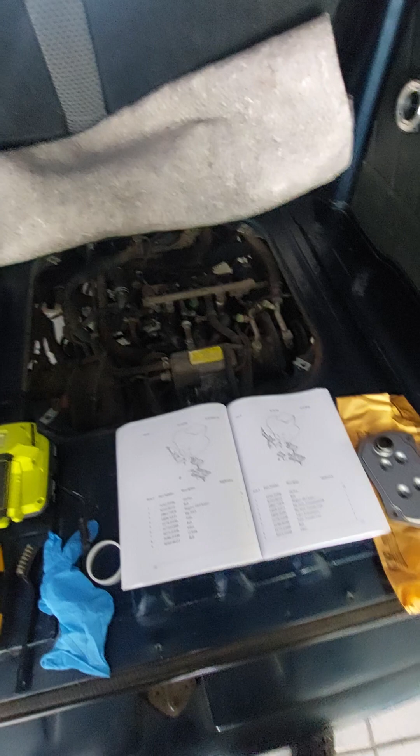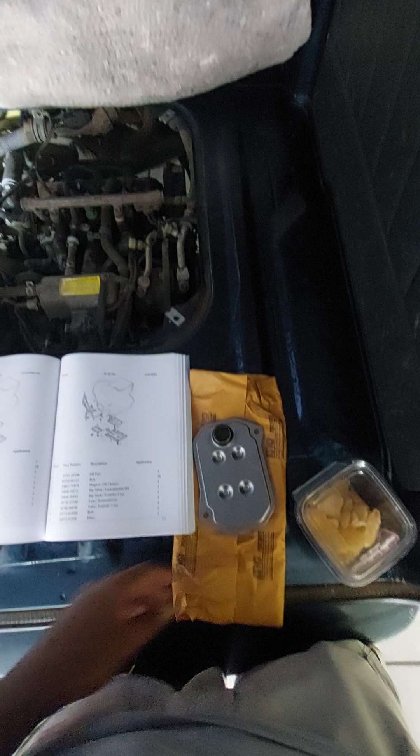Today I'll be working on the Suzuki JoyPop, a non-turbo F6 engine, DF51 chassis number, and today I'll be working on the automatic transmission filter and oil. I don't have the oil with me, but I do have the filter that I just bought from Amayama in Japan. It arrived pretty quick through UPS.

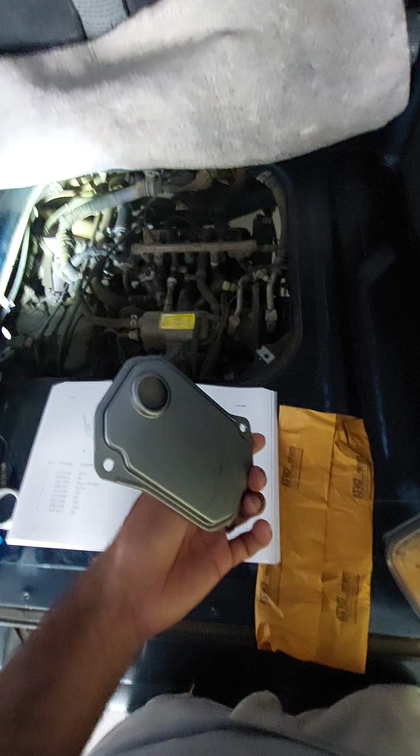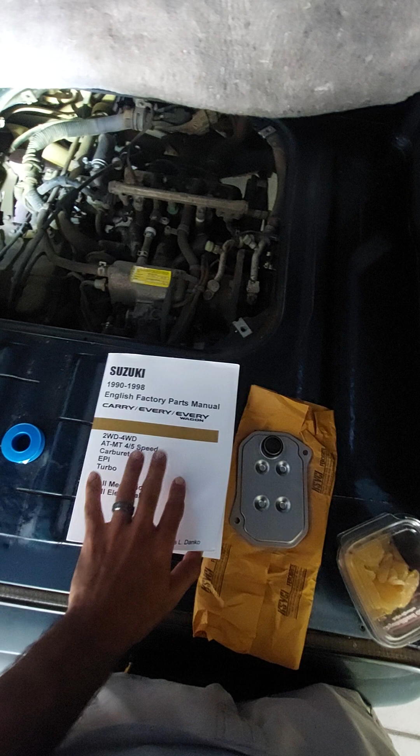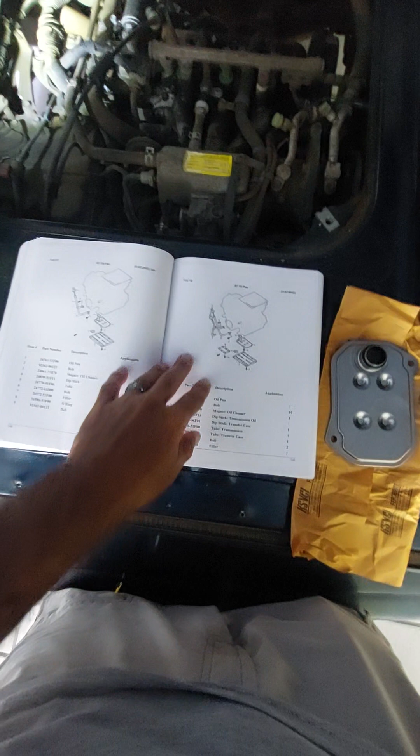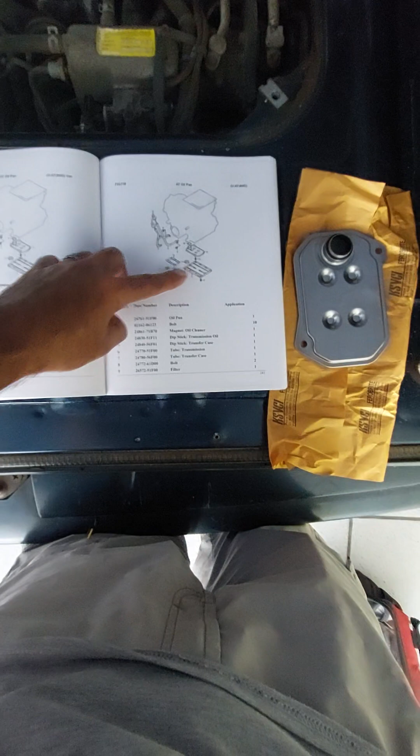So how did I find this automatic transmission oil filter? Well, I just bought the book first, because for the mini trucks it's much easier to find the parts, but it's not the same for the minivan. So I purchased the book through Amazon, which covers both Carry and Every van and mini truck. And here you can take a look at the four-wheel drive automatic van, which is the same that my wife has. And here you can see the filter.

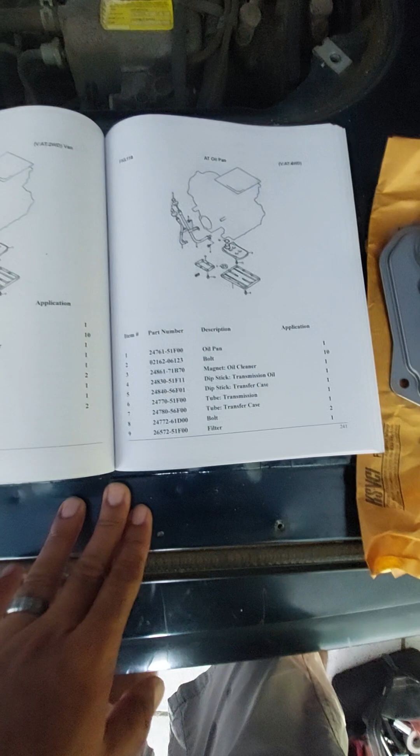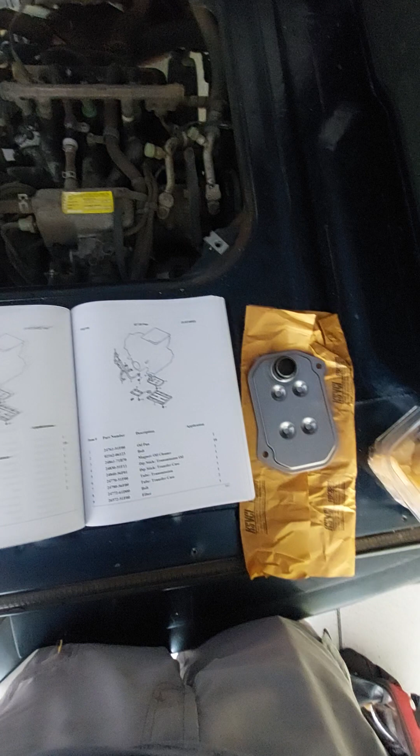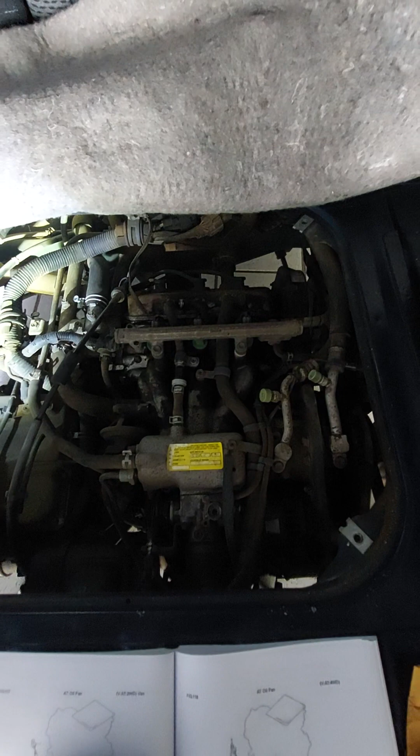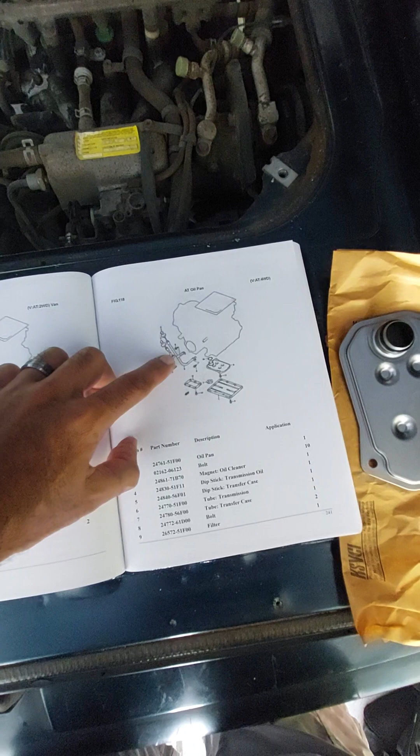Part number I can share with you is 2657251F00. That's for the automatic transmission filter. Obviously, if you have a manual transmission, you won't have this filter in your system. And my minivan is not carbureted, it's fuel injected, 1996. Okay, so here's the filter.

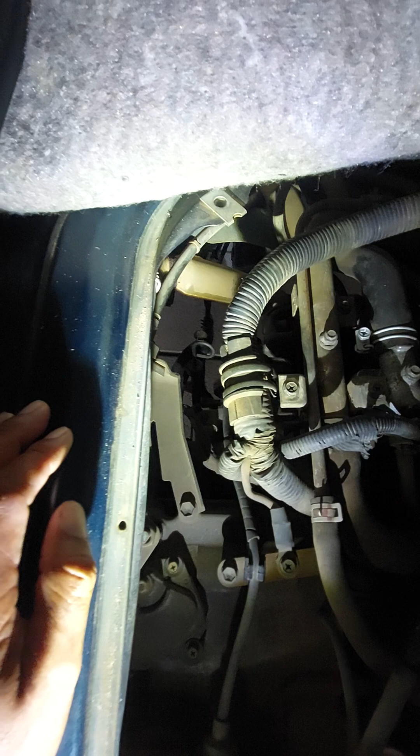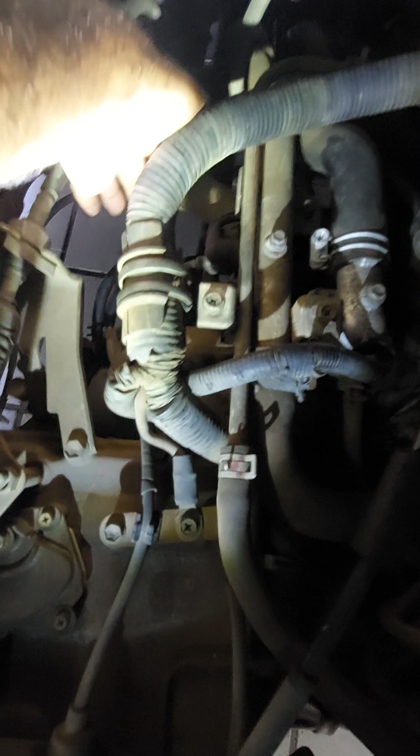Here you can see two dipsticks that you'll see next to the engine when you open up your trunk. One with the loop is for the ATF transmission fluid. The one in the back, this one here, this is ATF transmission fluid oil, and this one over here is for the gear oil, which is a lot thicker. So have that in mind when you're checking your fluids in your minivan. For the engine oil, that one will be over here. This is the dipstick.

Now let me show you pretty quick. I use a 24mm socket for the plug to drain the transmission before I start with anything else. And for the screws of the oil pan, it's a 10mm. Also, to remove the filter, it's 2 screws: 10 screws for the oil pan, another 2 screws for the oil filter. And I just pry the pan a little bit here. I put a recipient underneath to catch the oil, so that I wouldn't make a mess, but I still made a mess anyway. And that's pretty much it.

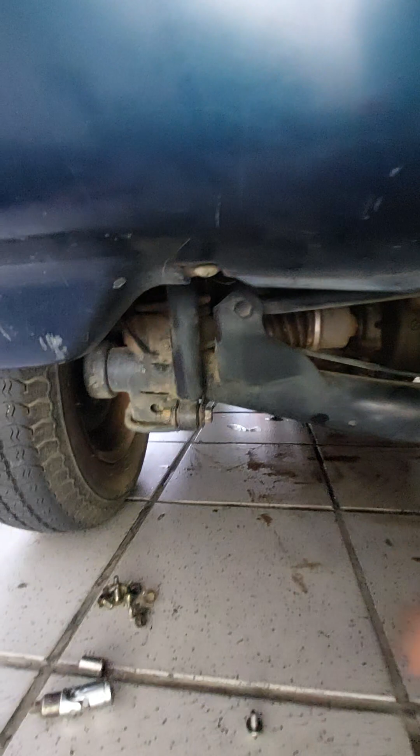You can probably see the screws here, and when you remove the filter, it's gonna look like this. When you remove the filter, be careful that it doesn't fall in your recipient and your catch, and have in mind that it will be holding on a seal or O-ring in this neck over here. So have that in mind when you remove it. And then you just pull it and keep it away from the water.

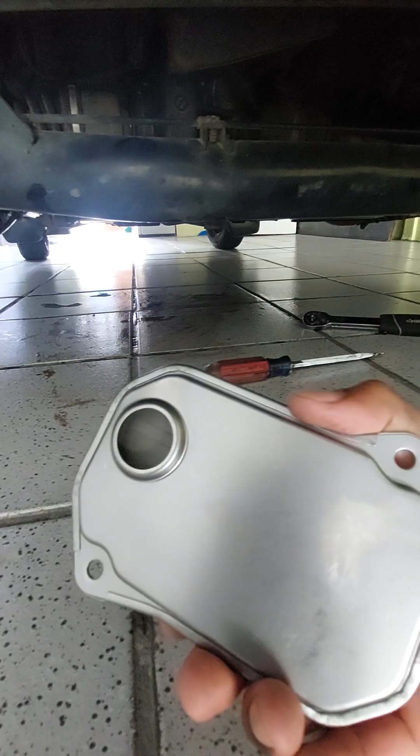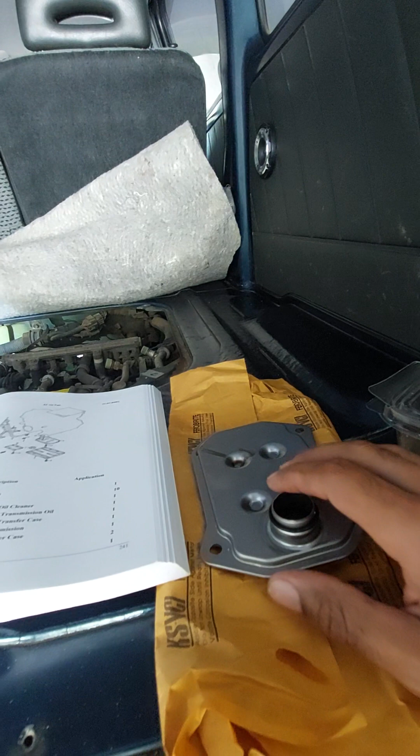As you can see, it has no paint. So if you order this and you're not gonna do the job right away, keep it away from humidity, don't store it outdoors, or just to make sure, order it when you're about to do the job. The other one that I removed wasn't looking that bad, but as soon as I washed it off with a degreaser, my mistake, almost immediately it turned brown, like from corrosion. So keep it away from water. While it's in the transmission, you don't have to worry because it's covered in oil.

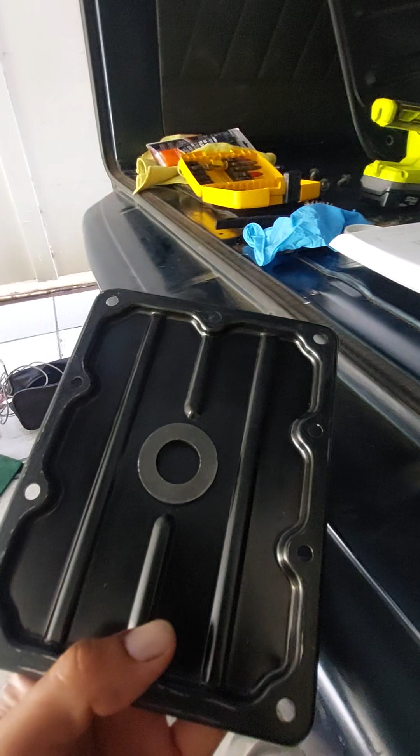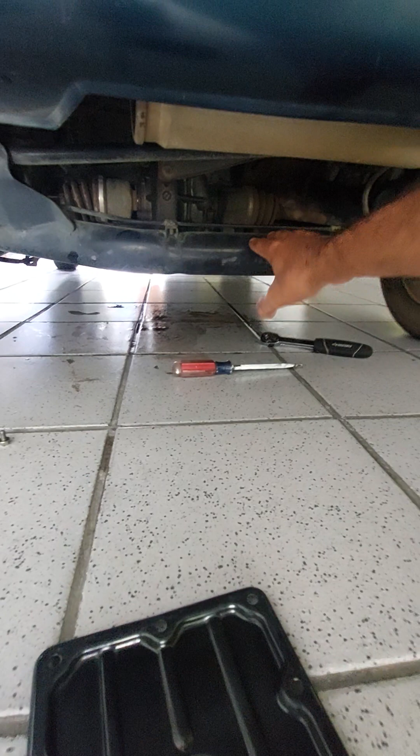This is the oil pan, and as you can see, I haven't even jacked the car. No need to. Pretty easy. The hardest part was to clean the gasket that someone previously made. That took some time. The mesh of the filter, you can see there's a mesh there. The previous one wasn't looking that bad.

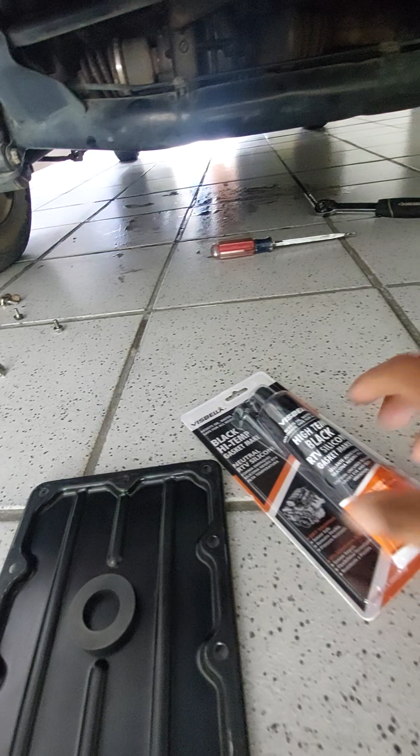The magnet that's supposed to collect all the metal particles was covered in a lot of it. It looked like a lot of mud covering the magnet, so it wasn't doing its job due to that. So I had to clean it up pretty good. It's kind of hard to pull it. I'm gonna put it back in the center, and the next step is to put the gasket maker. So that's the next step that I'm gonna do.

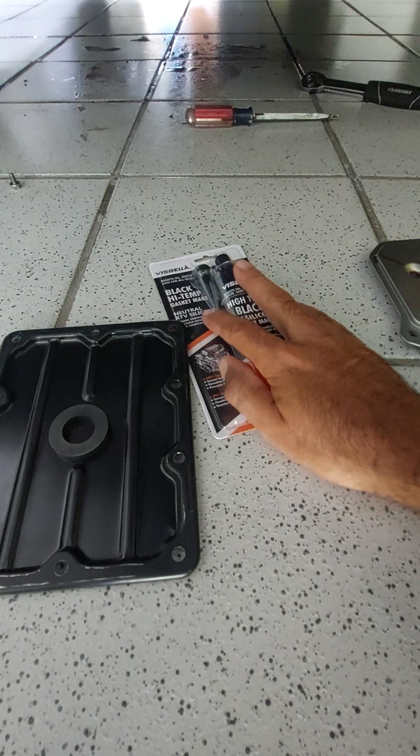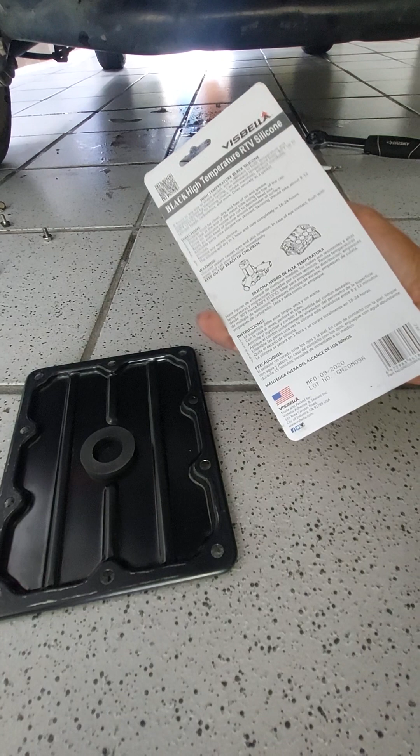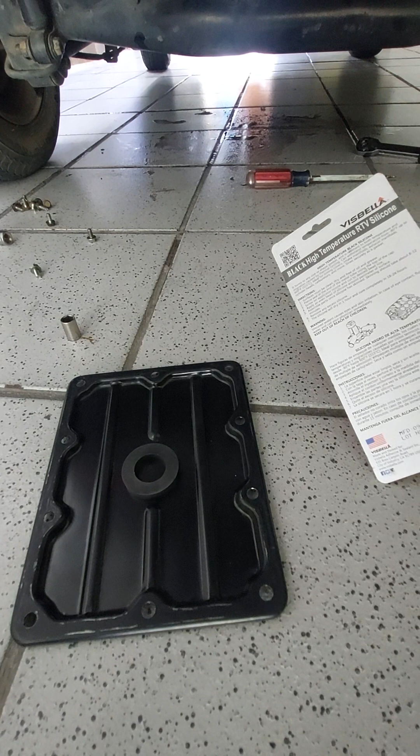I'm gonna apply it evenly around the corner. Follow the instructions. It says to leave it 8 to 12 minutes until you get to see like a skin on the silicone, and then you can put it on by hand with the screws. Then I have to wait like an hour before I use the sockets and the wrench. Oh, one more thing, I have to wait 24 hours before I fill it up with fluids or oil. So I won't be using this van for like two more days, to make sure that there is a nice seal on the pan.